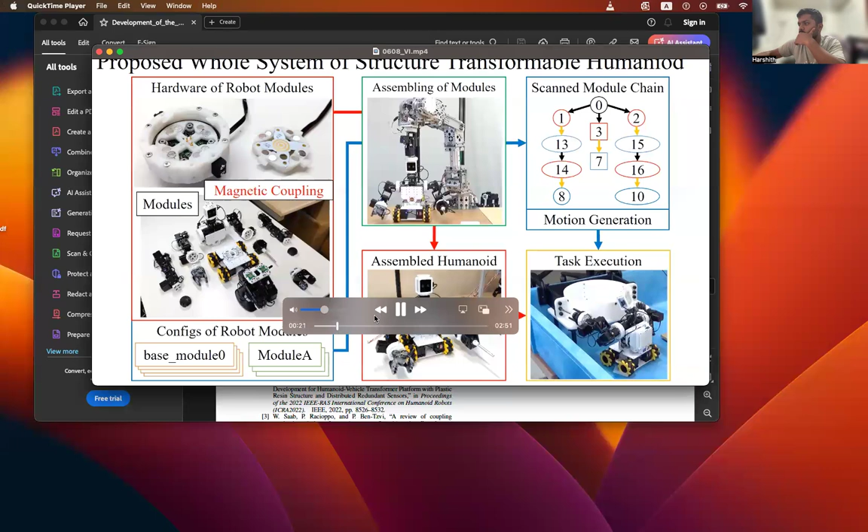Keep volume. This image is the overview of the proposed Structure Transformable Humanoid system. We prepare robot modules divided by magnetic couplings and assemble them manually or with the robot arm for forming real robots. The system generates robot models by scanning connected modules to form the module chain, and we use the model for motion generation and planning.

The small main module of the humanoid has a PC inside the body that communicates with the control board. The control board also communicates with the separate modules to create the module chain. The PC inside the body communicates with an external host PC, which uses the robot model consisting of shared modular information to generate the entire motion.

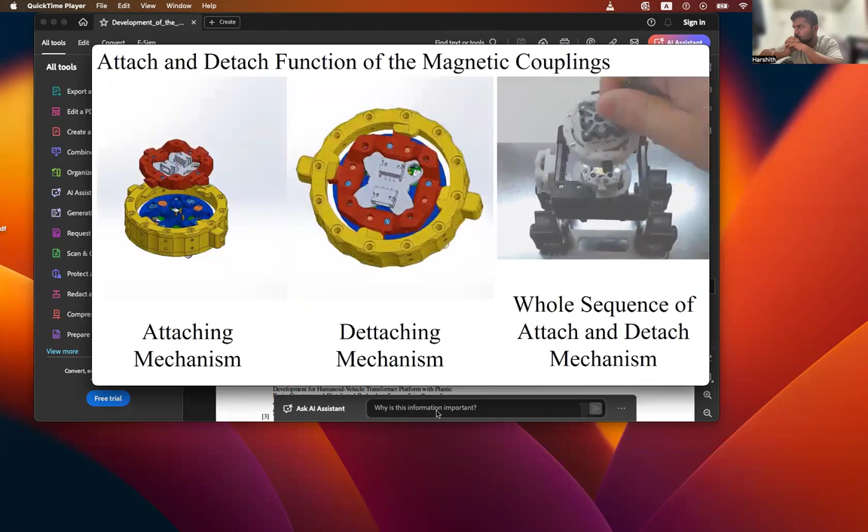The forces between the mechanisms drive the ring to attach them, and the ring structure can be rotated by an external moment to detach them. We evaluated the tolerable forces and moments of magnetic couplings. Communication was interrupted when we applied a maximum vertical separation force.

The amount of experimentation that has gone into this evaluation of durability of ALDMag is interesting and fascinating at the same time, because they are looking at the power of the magnetic pins or the pogo pins that they're using for the lock mechanism.

Also, this will decide the strength of the electrical connections as well, because without the strong electrical connections, it is not possible for the robot to send and receive signals effectively and without any delays when automating it totally. So I guess this is a crazy amount of work that they've done.

105 Newton. Communication was interrupted when we applied the maximum moments Mx and My, about 3.5 Newton meters. The allowable moment Mz was anisotropic, withstanding a maximum of about 1 Newton meter in the strong direction and separating at 0.4 Newton meters in the weak direction.

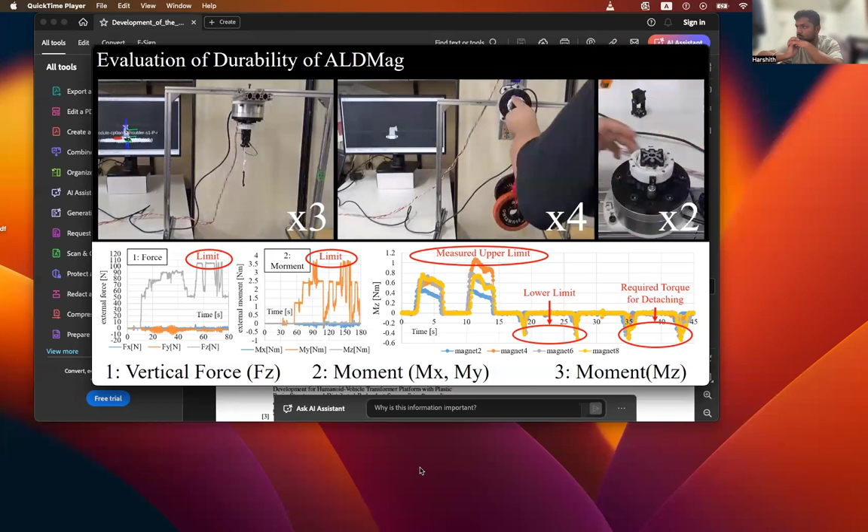The probability of attaching success was higher for those without locking mechanisms. Attaching sometimes fails due to the collision between the claw and the locking mechanism. In the visualization experiment, rescanning the device after... This part is what fascinates me.

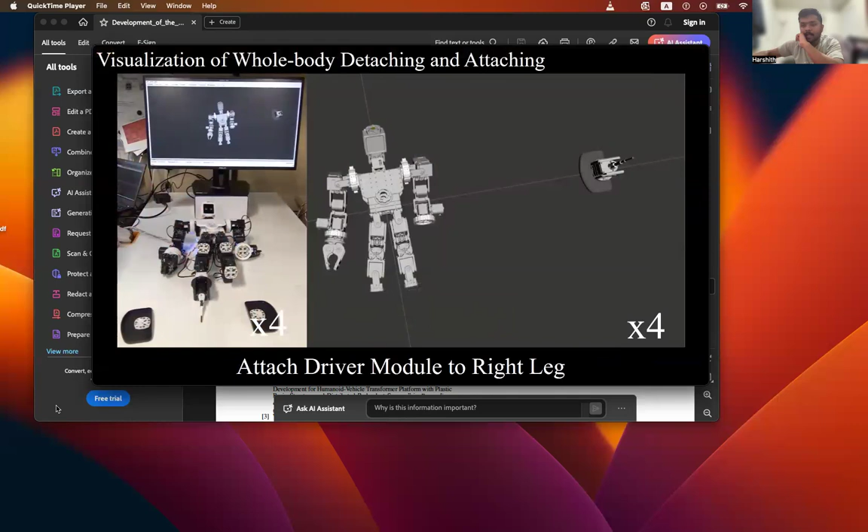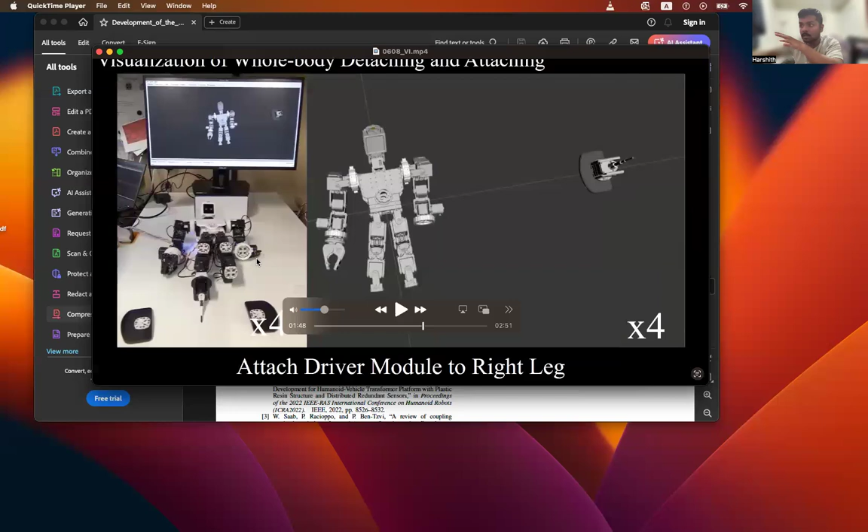So, as I mentioned previously, the end effector plays a vital role because that will decide whether the robot can successfully do the tasks that are assigned to it with the end effector that's in place or joined using those pogo pins.

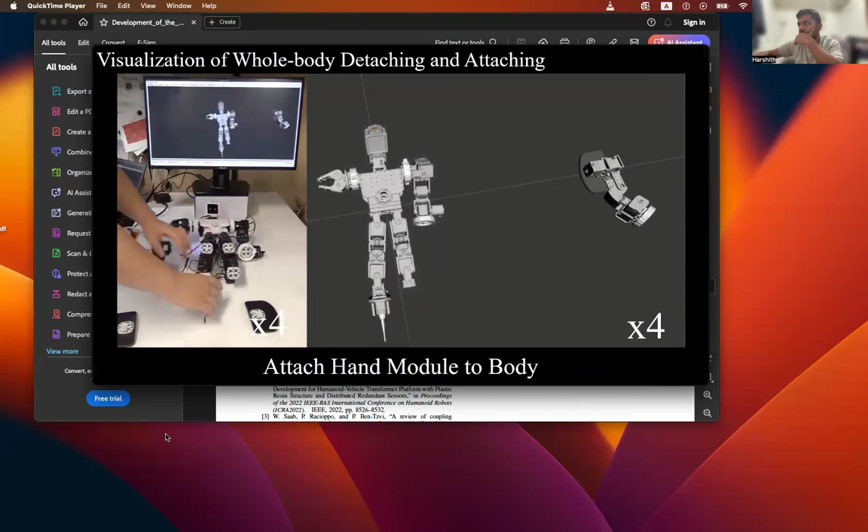Attaching the electric screwdriver module to the toe allowed detection of the new module. When the hand and arm modules were separated, we detected them immediately. For detaching, we separated the module by applying sufficient torque to the ring by vigorously turning the joint. For attaching, we achieved to attach the modules by simply pushing the magnet coupling downward.

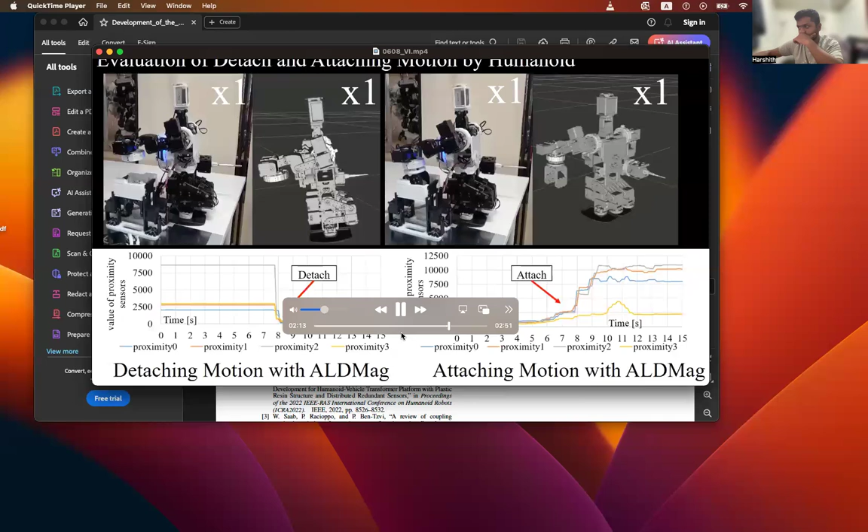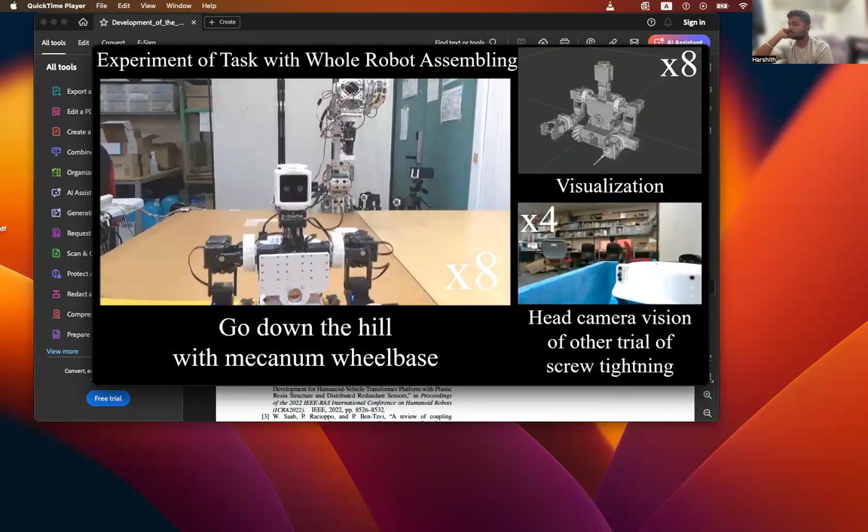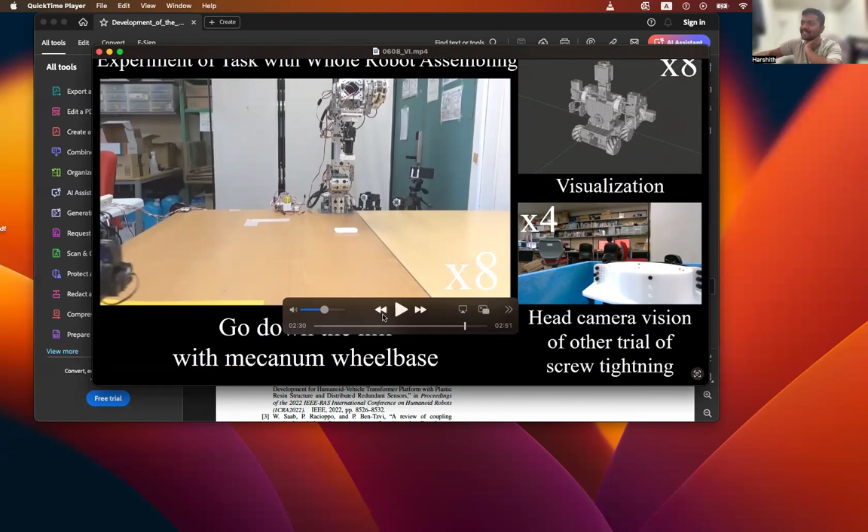After... You saw that as soon as it was attached, the robot detected every part on its body or structure and optimized itself on the simulation software, detected the actuation system that's in place, and accordingly, the movements are decided. This is totally fascinating.

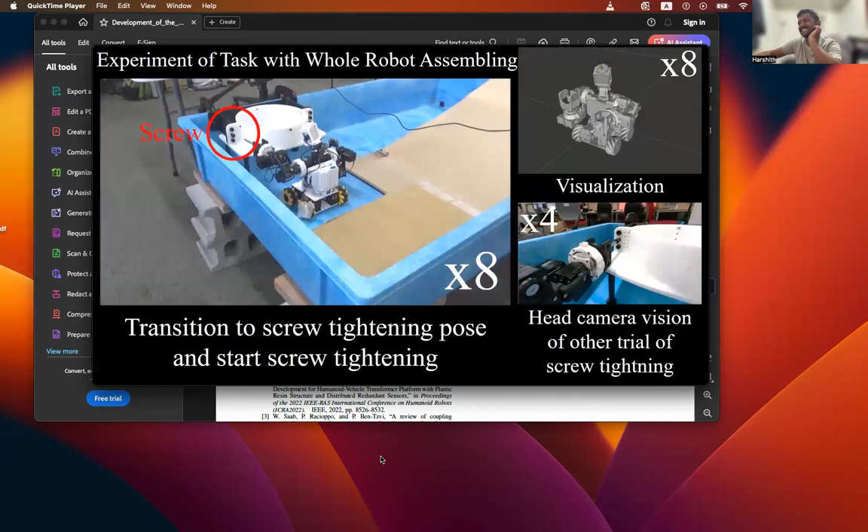Moving down, the robot uses an electric screwdriver to turn the screws in the environment until they are tight. It then attempts to return up the hill but falls over on the way back up. We configured the platform capable of validating assembling tasks and independent task executions by small humanoid. Falls on the ramp, falls while climbing the ramp. That's nice.

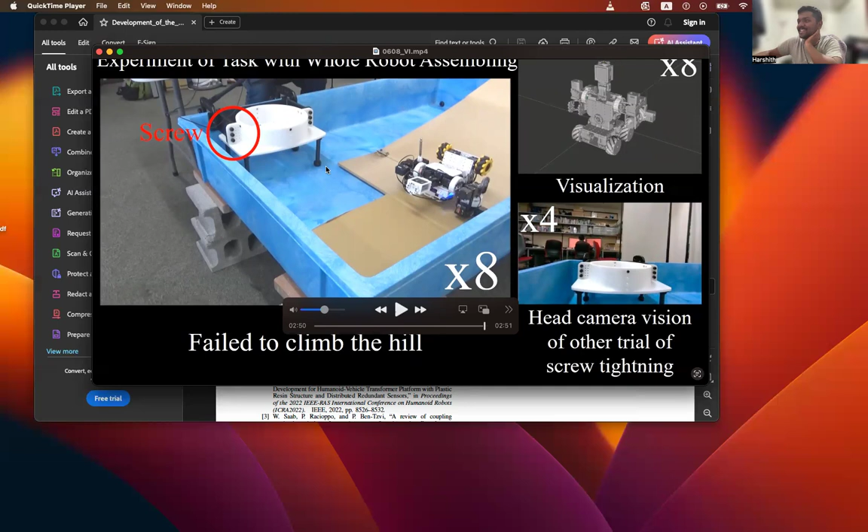So overall, this was the project that I wanted to speak to you about today. The very first video of the project section. Here it is. Kudos to the team of University of Tokyo, and congratulations on the publication at ICRA. And hope someone gets fascinated and clicks an idea to develop this and enhance this in a certain way where this particular research can go ahead. And I also wish all the best to the authors that they have set their vision far ahead from this one.